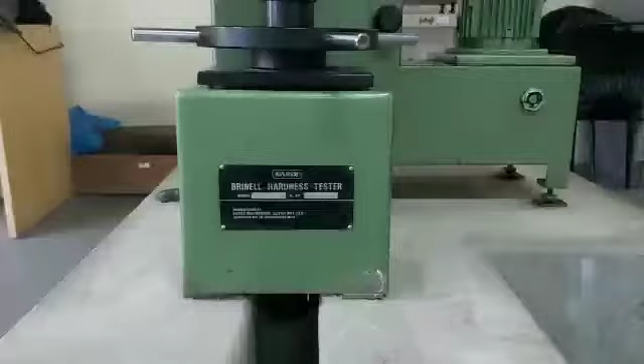Here we are going to conduct the Brinell hardness test of the mild steel specimen by using the Brinell hardness tester. So, first of all, when we are conducting the experiment, we should know why we need to conduct this experiment and what the objective of the experiment is. Once we question ourselves like that, why we have to conduct this experiment, then we will get certain interest to learn it.

So hardness is one of the mechanical properties of any material. Hardness is nothing but resistance to scratch or resistance to indentation, or generally we can call it resistance to deformation. So it is mandatory to know it wherever a certain application requires material hardness. So for that we need to conduct the experiment.

What is the hardness of this specimen? That is found by using the Brinell hardness testing machine. There are 3 to 4 hardness testers: Rockwell hardness testing, Brinell hardness, Vickers, and so on. So we are now conducting the Brinell hardness test of the steel specimen by using the Brinell hardness tester. So this is the Brinell hardness testing machine.

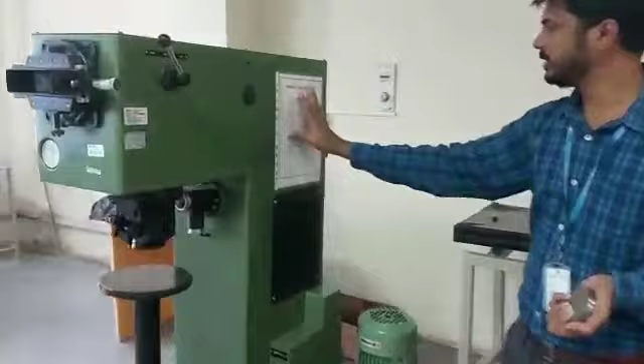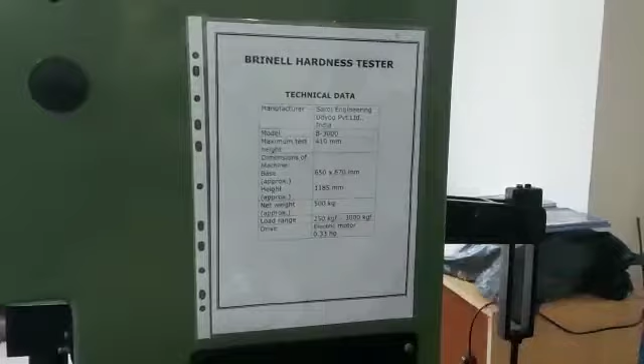So I want to tell about the specifications of the Brinell hardness tester. This machine can take a maximum test height of 410 millimeter, the dimensions of the machine are 650 into 670 mm, the height is 1185 mm, and the net weight is 500 kg. The load range, this is very important, is 250 kgf to 3000 kgf, and it is driven by an electric motor of 0.33 HP.

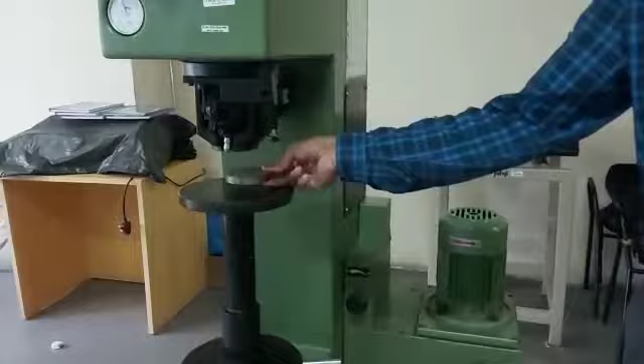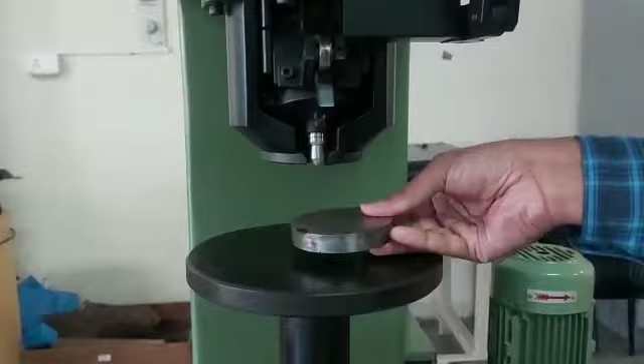Now there are certain important parts we should know. So this is the anvil, and this is the plate on which we will keep the specimen, and we can move the anvil based upon our convenience. This will be the lever, and here there is a ball indenter which will penetrate this steel specimen, so that we will get the indentation here in terms of diameter. So the ball indenter and indentation diameter we will get.

Indentation is nothing but a penetration when we apply the load. So once an indentation takes place, with the help of the microscope we can observe the image of the indentation diameter by using this screen. This screen shows the diameter of the indentation.

Our main objective is to find out the hardness of the steel specimen. By using this test, we can find out the indentation diameter with the help of this instrument. Once we find the indentation diameter, then by using the formula and calculation, we can find out the Brinell hardness number of the steel specimen. This is a mild steel specimen.

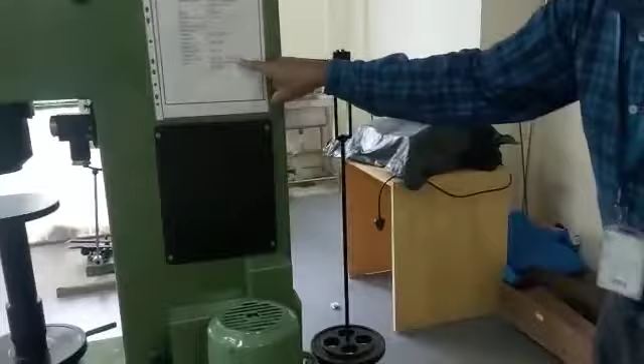So here is the cantilever beam where the load can be applied. The load range is 250 kgf to 3000 kgf. Here we will keep the load. Once we keep the load, the same amount of load is transferred on the steel specimen here, with the help of the motor. So that is the demonstration.

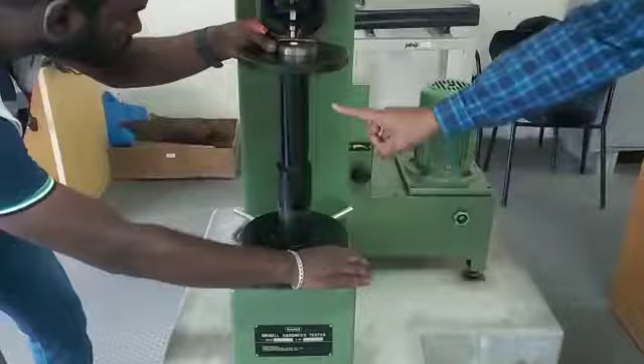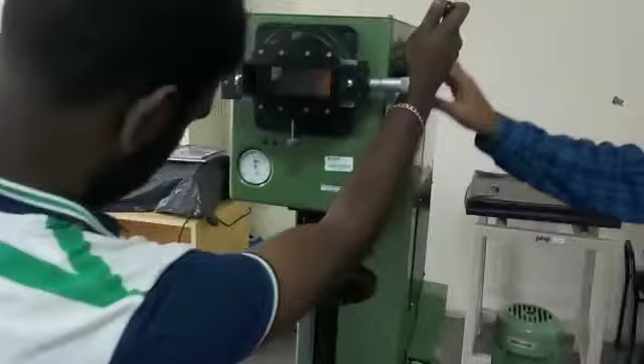Now we can do the demo of this. So this is the mild steel specimen. We will keep the mild steel specimen here. Karthik sir, adjustment. We will start how to conduct this experiment. This is the mild steel specimen we kept on the plate, and this is the anvil. So we can adjust the anvil. We have to make sure that the indenter touches the surface of the steel specimen, and load is applied.

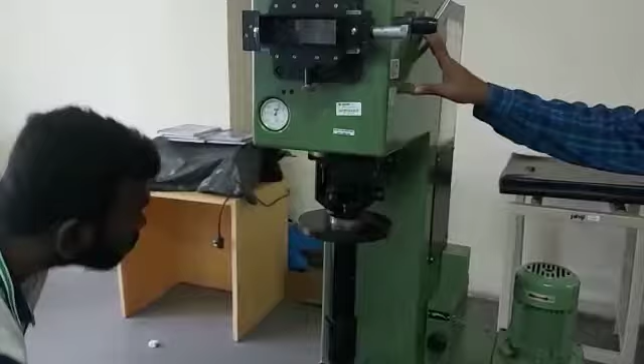Yeah. We have applied the load of 750 kgf. So there is an indentation. The indenter has penetrated the steel specimen, so that the indentation we can observe in the microscopic screen.

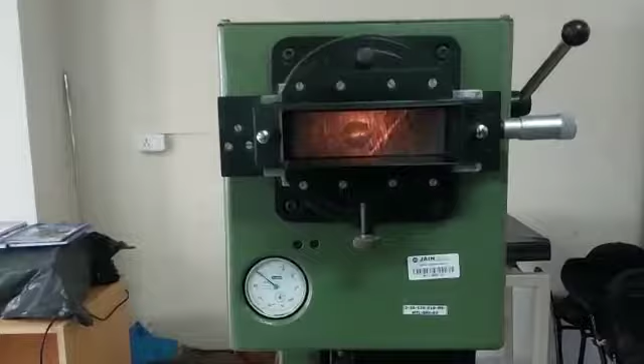Sorry, yeah. In this screen, we can identify the indentation diameter, and we can measure it with the help of this microscopic screen. So that is the main objective of this hardness tester. Then here there is a screw gauge, which will give the precise value of the indentation diameter. So that is how the experiment completes here.

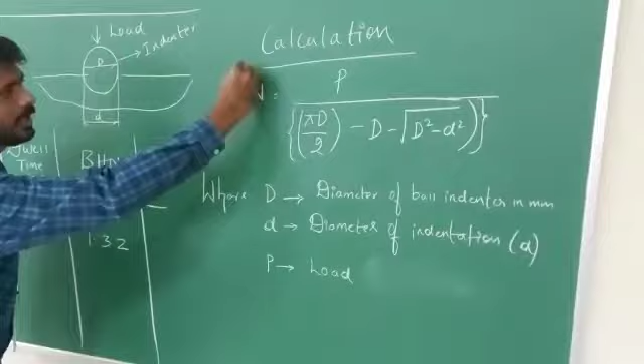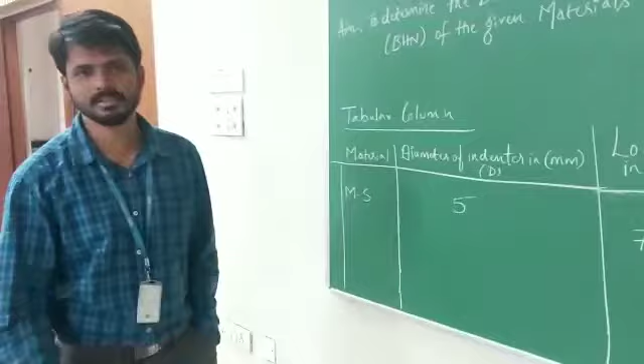Once we find out the indentation diameter, then we will put the values in the formula. With the help of this formula, we can find out the Brinell hardness number of mild steel. So look into this aim: determine the Brinell hardness number of the given material, that is, this mild steel specimen. The tabular column consists of name of material, diameter of the indenter, load, dwell time, and Brinell hardness number.

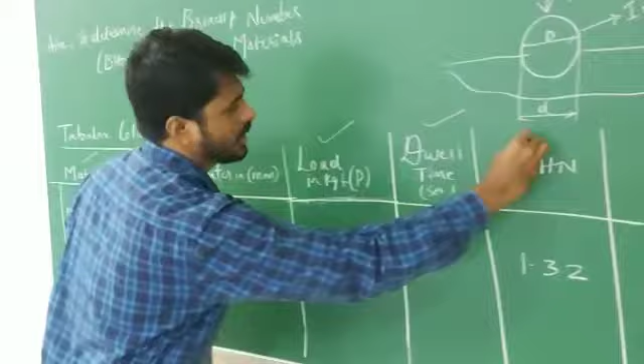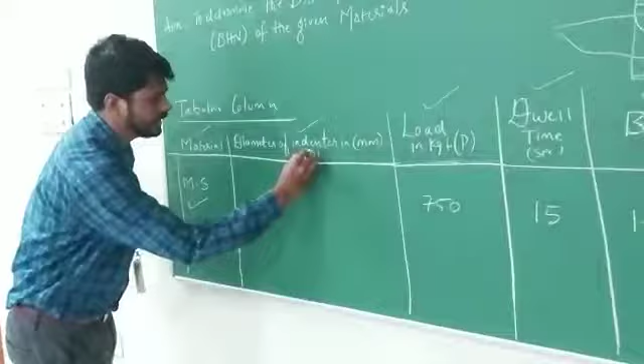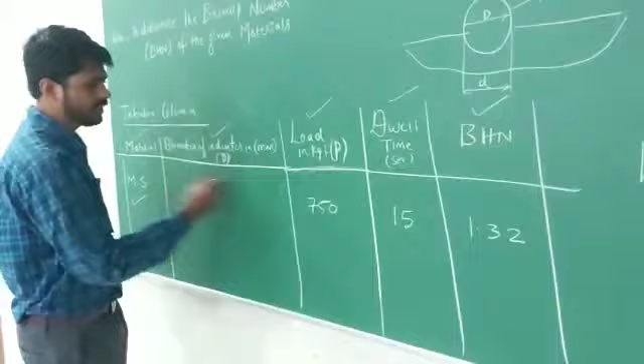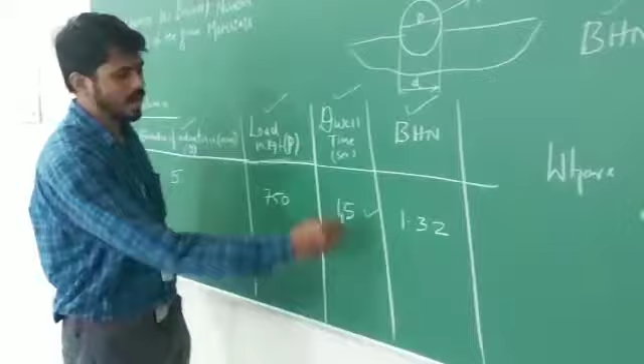So the material is mild steel, and the diameter of the indenter is constant, termed as capital letter D, and the load, in terms of kgf, is named as capital letter P. So for mild steel, this is 750 kgf, and the dwell time, or the indentation time, will be 15 seconds, a constant. This is the data we can get, and by using this formula we can find out the Brinell hardness number.

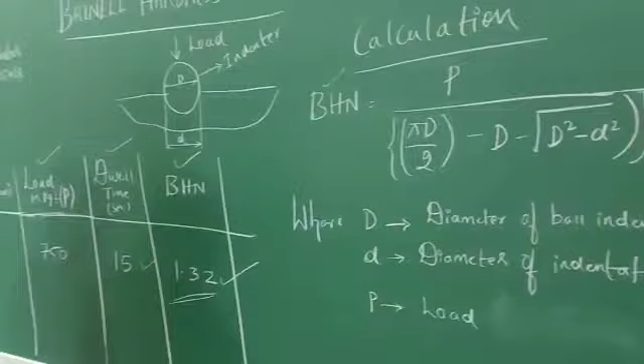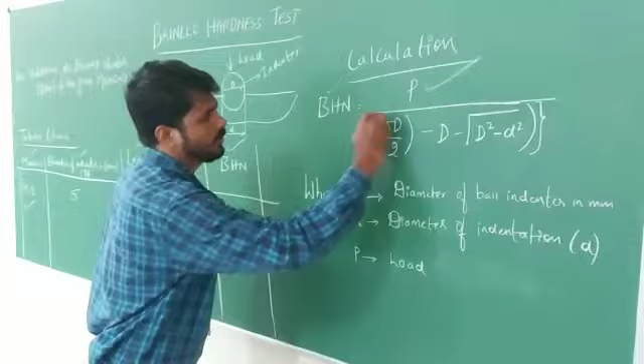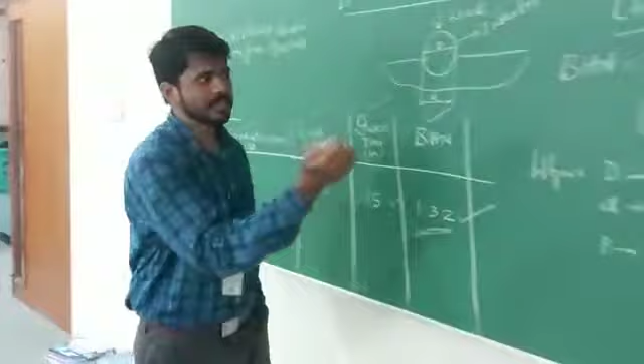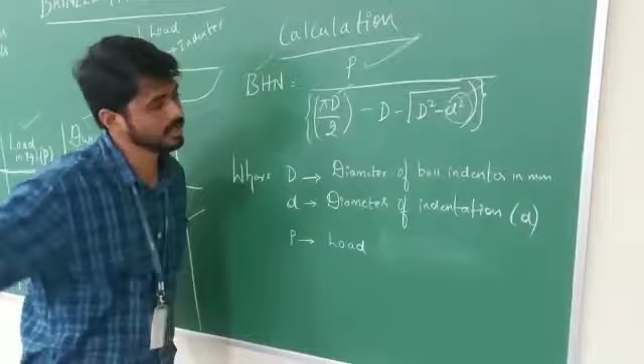P is the known value, that is the amount of load acting on the surface of the specimen, divided by pi D divided by 2 times (D minus square root of D square minus d square), where capital D is the indenter diameter and small d is the indentation diameter. We will get this value with the help of that instrument. So the indentation diameter we will get from the Brinell hardness tester.

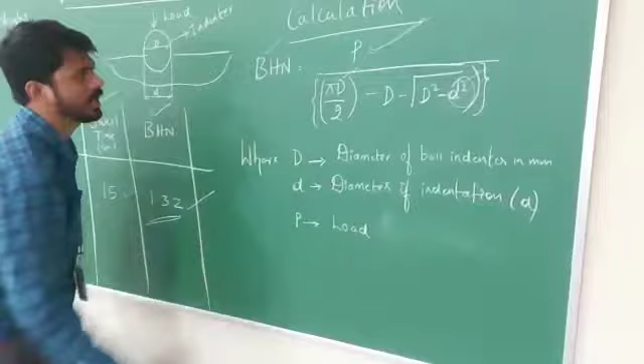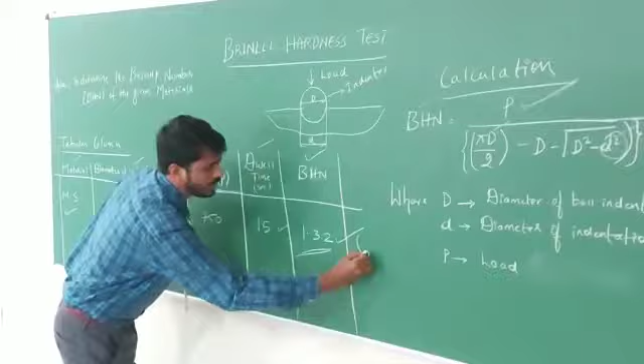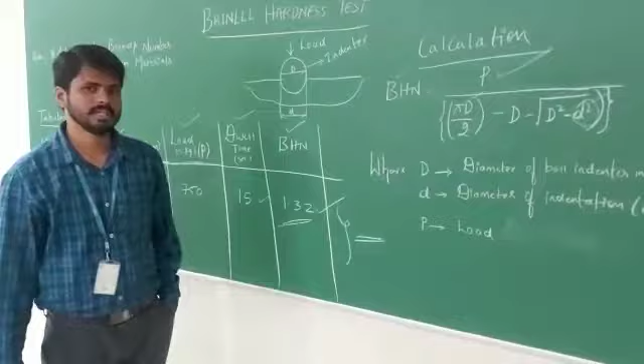So all the values we will put in this formula, so that we will get the Brinell hardness number of the steel specimen. The same test we have to conduct 3 times. So we take 3 samples, and we take the average value of Brinell hardness number of mild steel, and that will be the final value for the mild steel specimen. So this is how the calculation can be done to find out the Brinell hardness number of the steel specimen.